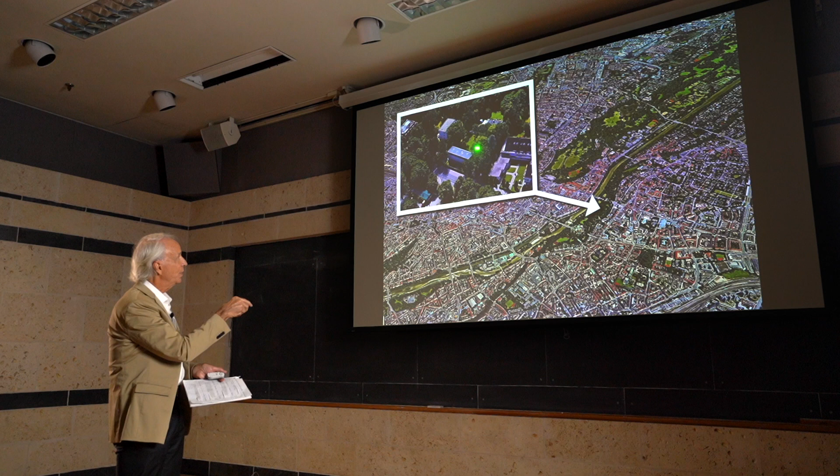So it's in Munich, in a residential neighborhood. This is the woman's house that has a lot of her art collection in it, and the gallery went in the front yard right there toward the street, and now there's a garden between the two. It's a very simple rectangular building in plan. Underground, there are some extensions that go out for utilities and for a little storage area for art.

You can see the section where there is a gallery with a clerestory window, and on the lower floor, there's a gallery with a clerestory window. Then there are stairs that take you up to a mezzanine level, because the mezzanine level for the lower floor is the ground, and that's where there are some of the offices and the entries at that level, and then the stair connecting those.

Now, that section was like that, where a good bit of the building is below the ground for some very good reasons. I mentioned in the last talk that they were very interested in energy conservation. They were birthed as architects in the 70s when there was an energy crisis, and so they were interested in passive solar heating. It's down below the ground, and they're using an earth-air heat exchanger where they use the warmer temperature of the ground to heat the building. So partly by putting it in the ground, that gives it some temperature stability.

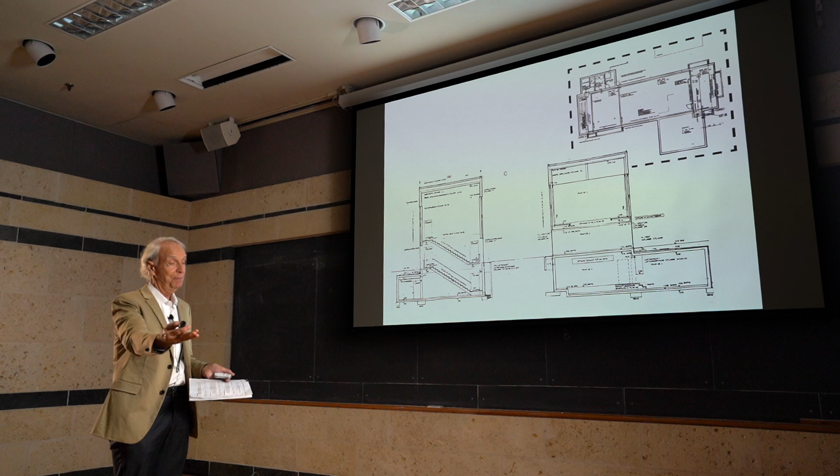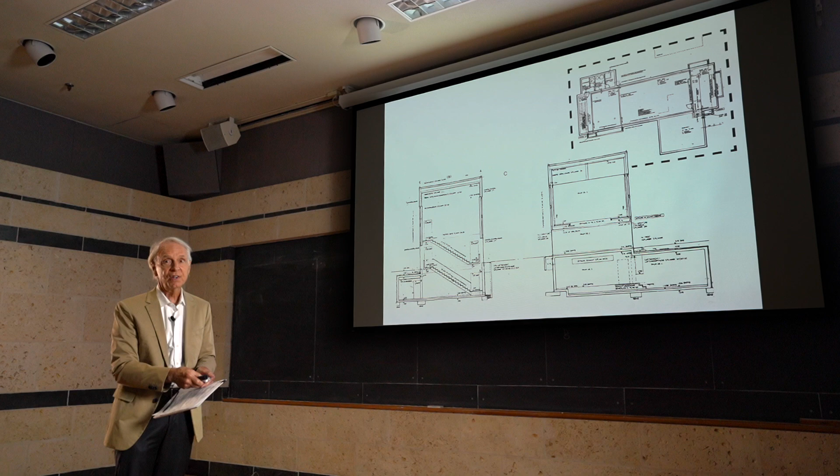They actually have air that is warmed through the ground and then heated a little bit more and sent into the galleries, so that when it's maybe 20 degrees outside, which it frequently is in Munich in the wintertime, well, the ground here is 60 degrees. So they can get it up 40 degrees by that means, and then they just boost in another 6 or 8 degrees to get it comfortable inside the gallery space. So it's that earth-air heat exchanger in the section of the building, and how it interacts with the ground has everything to do with energy conservation.

Another issue they deal with is this whole notion of materials. They're all over materials—they love materials as a generating factor for architecture. They say, we're trying to expand the role assigned to materials in traditional usage by changing their form and making them available to a new manner of perception. All materials interest us in the same way. When one speaks of materials, it always depends on how they're joined together, in what manner they're used, and so on. So obviously in the Goetz Gallery, there's very interesting material usage with that birch paneling and the very sleek glass that's very ephemeral.

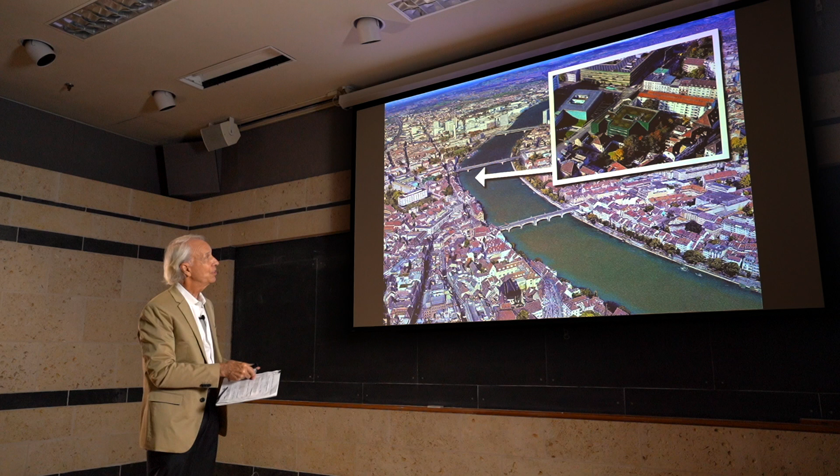That's one thing that's nice about that neighborhood: you have your normal European fabric, which has very little green, but this one has tons of little pocket parks around. On their site there was a little pocket of green, but it didn't creep out to the street. So the idea was to take that green and extend it out to the street. They used green fritted glass, and vines as well.

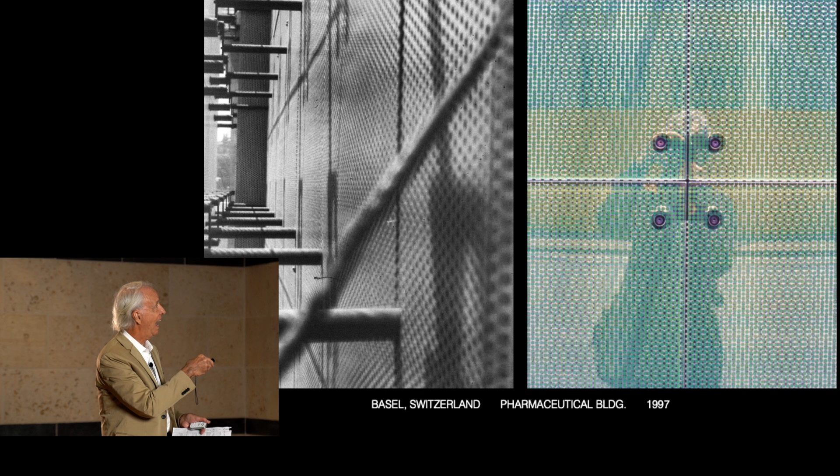The green fritted glass is very beautiful, a sensual material—something you wouldn't expect glass to have this kind of presence. It's got a dot pattern, and at the corner where you see two layers of glass, you can see a moire pattern when one dot pattern plays against another. That's happening all over the building because there's about an 18-inch space between the glass and the outriggers that hold it up.

The skin of the building is an insulated panel which also has dots on it, and the dots on the insulated panel match the dot frit on the glass exactly. So as you're looking at it, you're constantly seeing this play between the two dot patterns, which gives an active liveliness and depth to the glass that's really quite extraordinary.

It's also doing a big thermal job. The sun shines in and heats up that area in the wintertime, creating a nice blanket of warm air outside the building. So all the way around, instead of trying to heat the building to 68 degrees against 20 degrees outside, they've superheated this blanket of air via the greenhouse effect to maybe 65 degrees, so they might not even need to heat the building on the inside, except on extreme days.

So again, it's passive solar—they're using the glass for technical purposes, and also for this rich visual purpose. Here the glass is on a courtyard on the inside where they have water on the floor with lily pads, so there are green dots on the water and green dots in the frit, and you can even see it in the glass on the soffit.

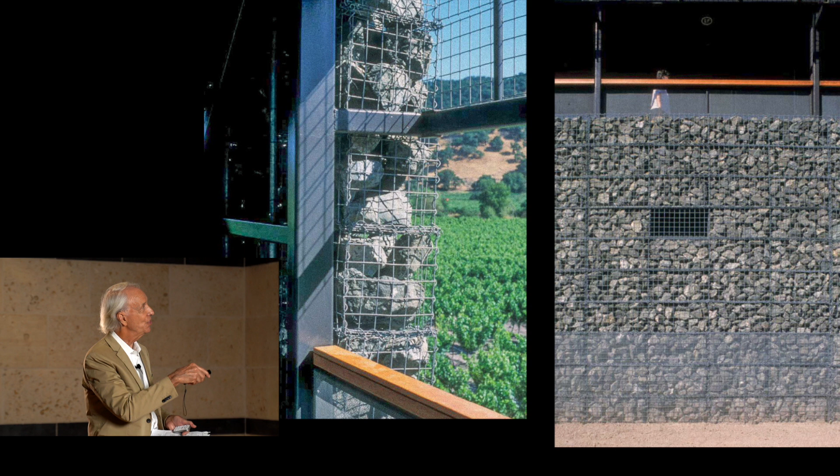And the building is actually made of gabions, which is a wire armature with these rocks that are actually local rocks, the kind of rocks you take out of the field when you start to till it for the vineyards. They become just a part of the building instead of a part of the landscape there. And they're being used technically in many ways.

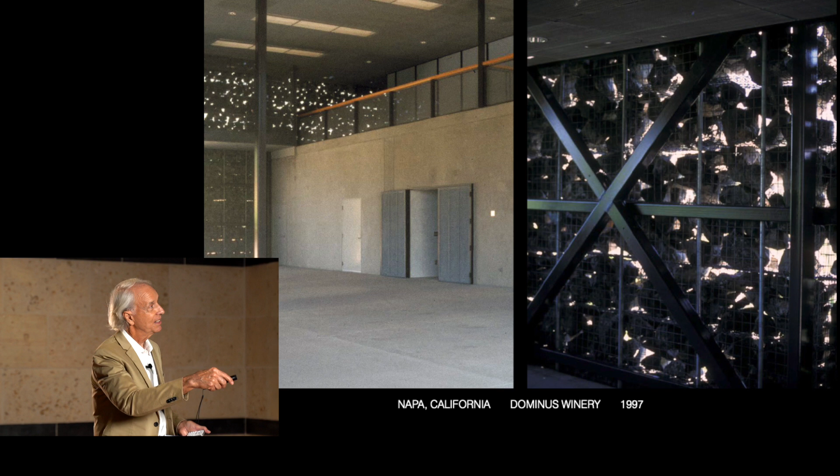The hot sun hits the rocks, that heats them up, and the warm air rises through that porous layer of the rocks. And then it creates a breeze that draws the air through the building, all around. So it makes it able to, if you have a shady space with that air movement, be very comfortable anywhere in the building with no heating and air conditioning.

And because this is a pretty salubrious climate, many of the spaces that are really active spaces are outdoors. The passageways are all outdoors. They're outdoor conference rooms. So this is the second floor and office areas, and there's very little ductwork, as you can see on the ceiling. There's not really that much heating and cooling. Mostly the building is taken care of in a totally passive way. And that's true in the more technical parts of the building as well.

This is not a snooty winery where you go and do wine tastings for the tourists. Not at all. In fact, tourists can't go there. It's strictly an industrial production facility.

So they're processing the wine in these tanks, and then they're putting them in wooden kegs, and they're aging the wine there. And in both environments, they need a very stable temperature. So the building is all about keeping that stable temperature. And of course, one incredible device for doing that is high thermal mass. So if you can get, like in a cave where wine was kept originally, that high thermal mass keeps a stable temperature and resists the diurnal swing of warm during the middle of the day and cool at night.

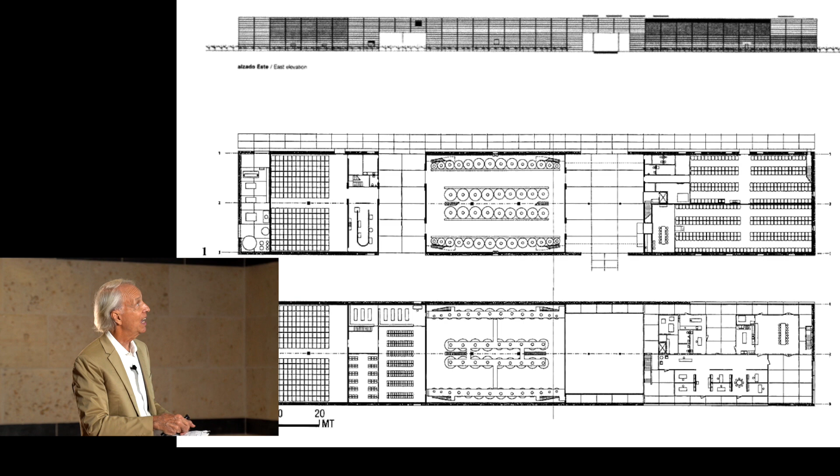So those thick concrete walls that we're seeing around here, as well as the gabions on the outside, are providing that very, very high thermal mass that gives great temperature stability to the aging room here, to the processing room there, and to all of those parts of the building that have to do with that greater temperature stability.

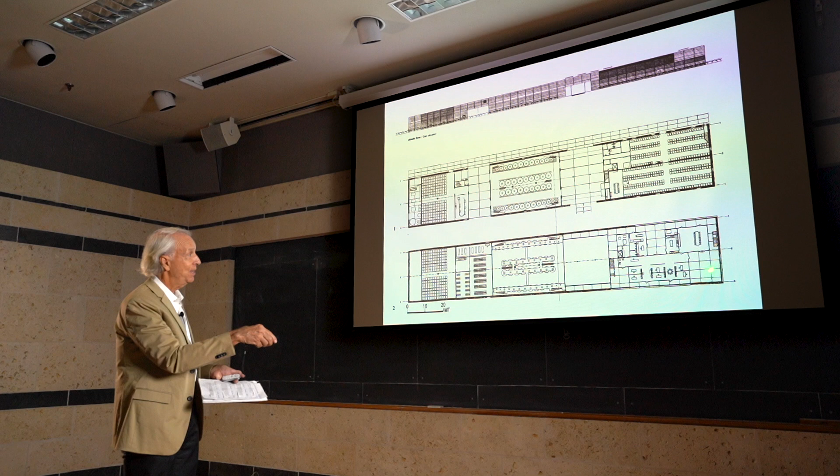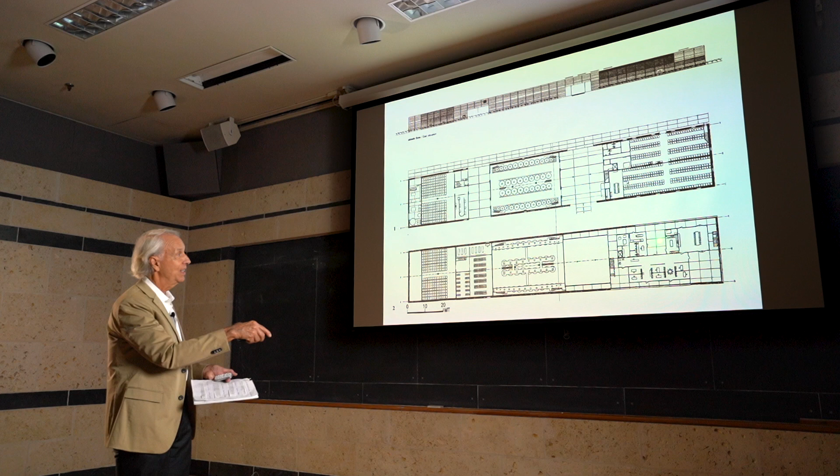Then up here, where we're getting the offices, those walls thin up, the concrete is gone, we don't have the gabions anymore, we have large openings, and that's where you get these open areas that are passively heated and cooled and ventilated, with beautiful views out to the vineyard. There you can see that massive wall down where these kegs are, the thick concrete, and then the gabions on that, keeping that great thermal stability.

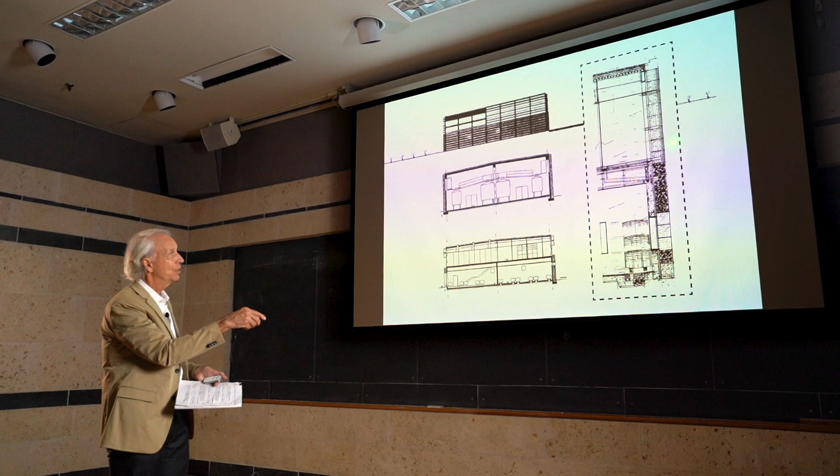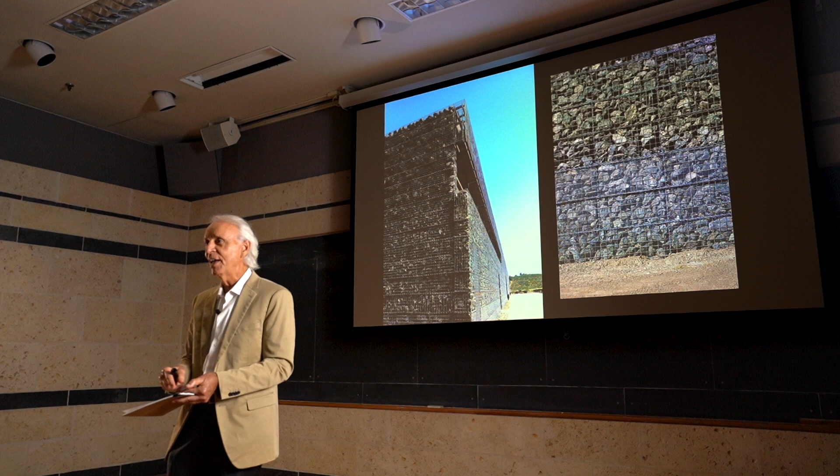Above it, where you have the offices, the whole wall is gone, and it's a completely different thermal situation. The gabions are a very odd material - this is them exploring materials in an incredible way. Gabions are usually used for retaining walls in a very utilitarian kind of way, but here they fit the agricultural environment very beautifully. They inexpensively get the high thermal mass that's needed, and they create a beautiful texture to the building.

From the inside, there's an amazing light quality with the light coming through those gabions into some of those upstairs spaces that we see right there. So again, it's about taking natural forces and using them - it's the soil, the sun, the orientation, the geography, the heating and cooling. All of those natural forces are what's really making the architecture.

Another issue that's very prominent in Herzog and de Meuron's work is a reaction not just to natural forces in a natural context, but to urban forces in an urban context. Let me read a quotation from them: 'It's important to us to find the right architecture for each place, which, if possible, is then completed by the city. We have no desire to set up a new establishment, but on the contrary, we want to pursue existing inceptions in order to complete the city, so to speak.'

So the idea is that you're not starting from scratch in a city - you're making the next step in that city. In the case of the Tate Modern Museum at Bankside in London, it was a situation where they actually had an existing building. That's the urban fabric that was there. They started with this old industrial building - it was a power plant. And it was again a competition, which they won.

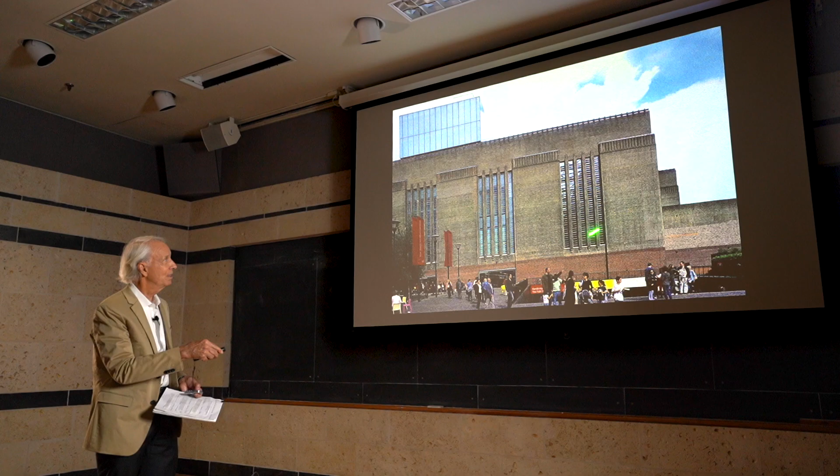While all the other star architects were out there pushing and pulling and manipulating the building, their attitude was: we let the context speak for itself, and if it's doing good, we just leave it alone. So these interventions were very elegant and very beautiful.

The really big move was they took the turbine room in the back of the building, took all the big turbines out, and then made it an incredible atrium space that gave you views up into all the galleries and became a place where you could make art as well. Artists are regularly given the room and asked to make a piece commissioned for that room. So again, a beautiful example of how they took that context and just ran with it - they let it tell them where the project should go.

Then 6 or 8 years later, that museum was super successful. It then spawned a lot of development all around it, just immediately - condominium buildings, office buildings, it got to be a smart part of town, cool restaurants, cafes. Suddenly that became the place to be because of the Tate Gallery moving in.

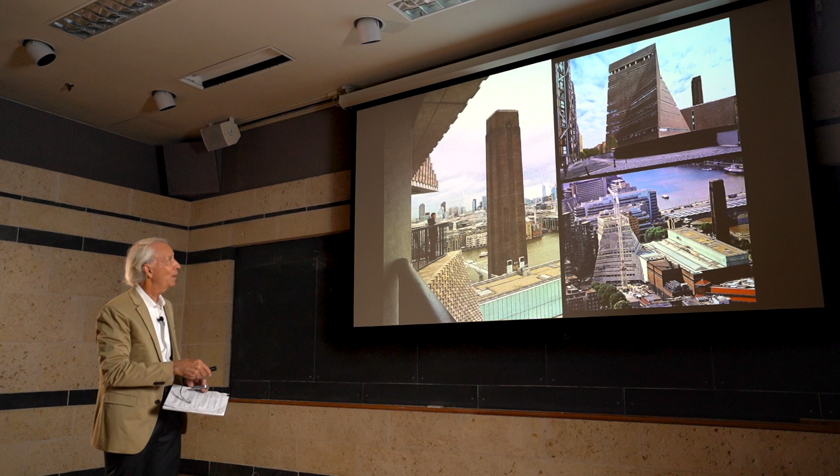And the Tate decided to expand. When they expanded, again, Herzog and de Meuron made a building that is very sympathetic to the context, the original building there, but now matching more the scale of the new development around it, letting the building grow out of a reaction to the city and an engagement with the city. There it is under construction with those other new buildings around it. But now it's able to get up and get some views, making the connection even stronger back to St. Paul's on the other side of the Thames.

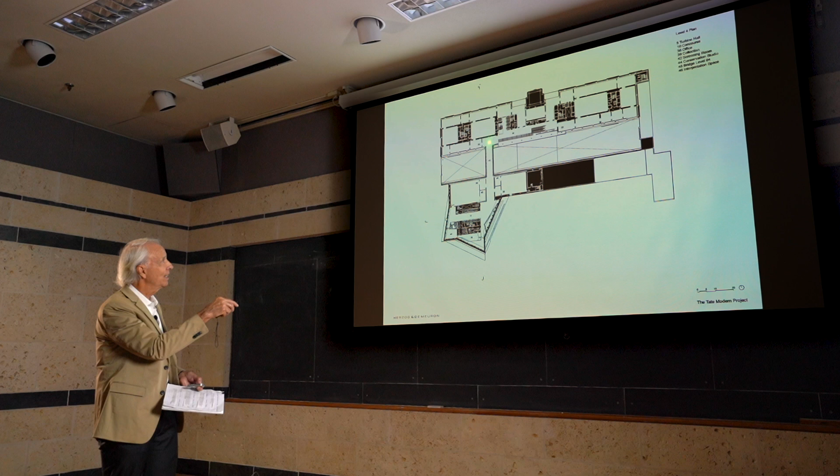That becomes kind of seamlessly woven into the galleries on this side in the old Bankside building - now with a bridge across that atrium space and into the new building on the other side of it. But it's seamlessly growing out of, just evolving out of the city and becoming a reflection of spaces in the city that then become a museum and an engagement with the interior of the building as well as with these ideas about the context there.

So is it new and fresh and different? Of course it is. Is it also like a sibling, like a kind neighbor? Of course it is.

And those things are not incompatible. Herzog and de Meuron seem to have an incredible capability of doing that. Now, that's at Bankside in London.

I want to show another example, a little bit different way of approaching that, at the Walker Art Center in Minneapolis in the United States. This is a very strong, very interesting building. This is them going crazy with materials again.

The skin here—this is of course northern climate, lots of snow—they were kind of inspired again by natural forces. How could we make the skin of the building almost seem like snow, like the texture and the irregularity, but still the uniform whiteness of snow. So it's an incredible sort of mashed up metal panel that's got perforations in it that gets reflection in very different ways, different angles, and makes a beautiful skin for the building.

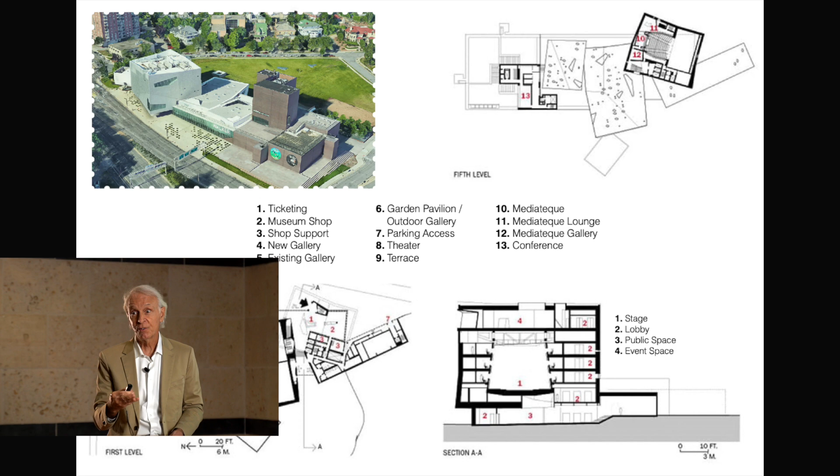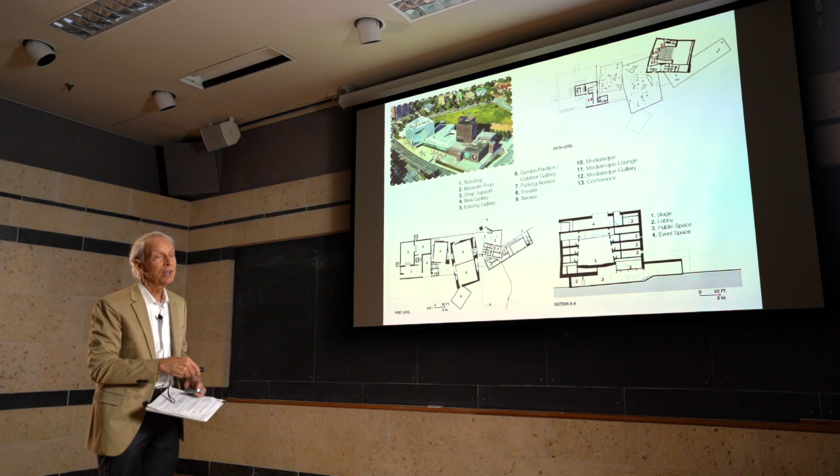But they make a very clear distinction: this is the jewel that was done by Edward Larrabee Barnes in another period, and we're not trying to be Edward Larrabee Barnes or do that. We're going to be a really good neighbor. We're going to have a really nice dialogue. And we're going to take little moments of that and thread it into the building, but it's not going to be a kind of seamless extension or replication.

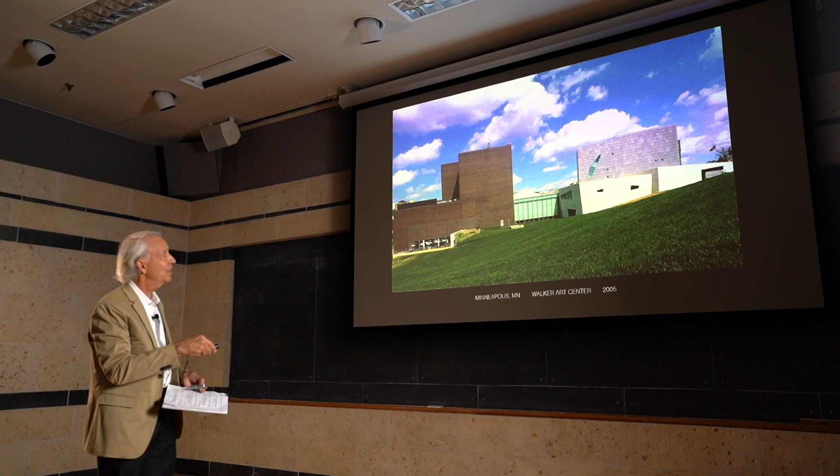So that's how it sits in the city, just at the edge of downtown Minneapolis, with this park in the back that both buildings spill onto, both buildings engaging with the park there. And the lower portion of the building is just like the lower portion of the old building, and the tower just like the tower of the old building.

And then inside, taking all those rich white colored materials but combining that with that Nebraska iron spot brick. So they take the same flooring material from the old building into the new building. So there is a kind of seamless journey inside between the two buildings, and that becomes a major feature on the inside of the new building.

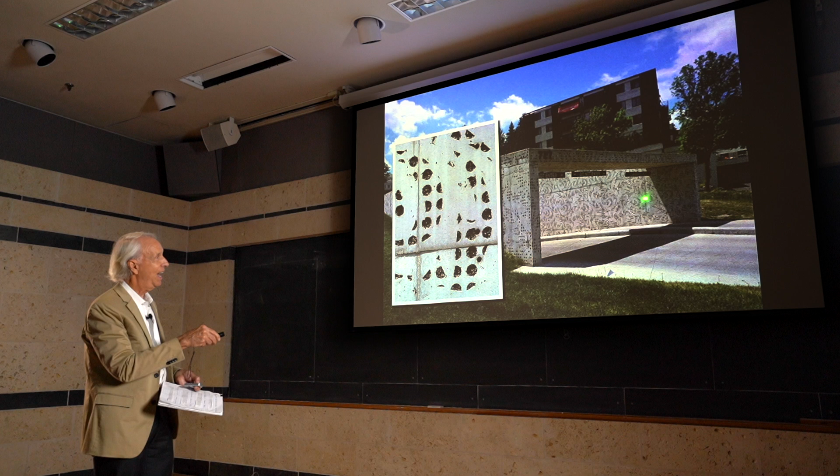They are so clever with the use of ornament. In this case, a little bit of whimsy and flourish. This is a concrete wall going down to the parking garage where they just put a form release on the concrete formwork that creates this same pattern that's on the inside of the building in a very subtle way.

Again, they're doing many of the things we talked about: incredible material usage, incredible use of the forces of nature. But in that case also, a little bit different take on the way they use the urban environment to generate architectural form. Okay, the fifth issue I want us to look at is on this notion of integration, of how you take all the pieces of architecture and synthesize them.

So they say, we are not particularly interested in either structure or ornament or space as such. Things start to get interesting when you bring these elements together in a single thing. And if you can experience it by moving through the building, by using it, when you integrate them into a whole, it's easier to make them reappear.

So the idea is that you don't focus on structure, you don't focus on ornament. You're doing all these things concurrently in a way that the whole adds up to more than the sum of the parts—you get real synergy in that. And I think a great example of that is the De Young Museum in San Francisco. This is the building that, right after they got run off from UT and did not do the Blanton Museum, they immediately got the commission to do the De Young Museum in San Francisco.

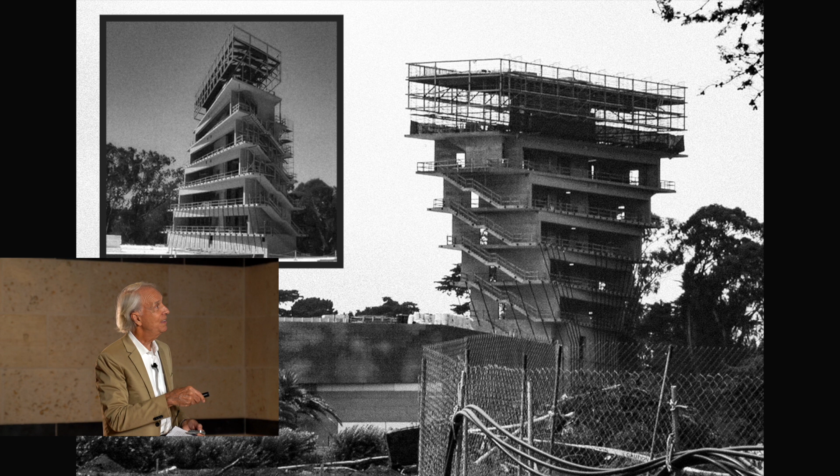This structure is twisted around like that in order to give it lateral stability. It's in an earthquake-prone area. If you just made a long, thin rectangular box in the short dimension, there would be a weakness that in an earthquake might give way structurally. So they twist it so there's not a short dimension, so it's resisting loads in multiple directions, dealing with those lateral loads that are vulnerable in an earthquake.

So it is structure, its form, its space, its view, its function, but all of those things happening at once in one kind of strong, synergistic gesture.

I think the skin could be looked at the same way. This beautiful copper skin sheaths the entire building. It's both perforated and dimpled. Dimpled to give it greater strength. Perforated because sometimes you want ventilation. It's used to cover air intake areas for the air conditioning equipment.

And then it can get denser and thicker and not be there for intake in the air conditioning equipment. It's sometimes used for shade. You can see here there are two layers of it, giving a wonderful dappled light, a soft light down below. So it's used for sun control there.

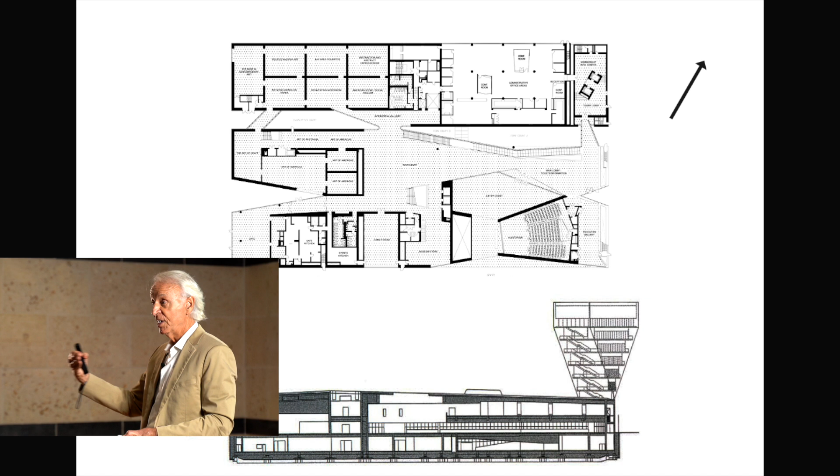So that's what they're saying, that when you integrate all of these issues, that's when architecture really gets interesting, and it begins to be more experiential.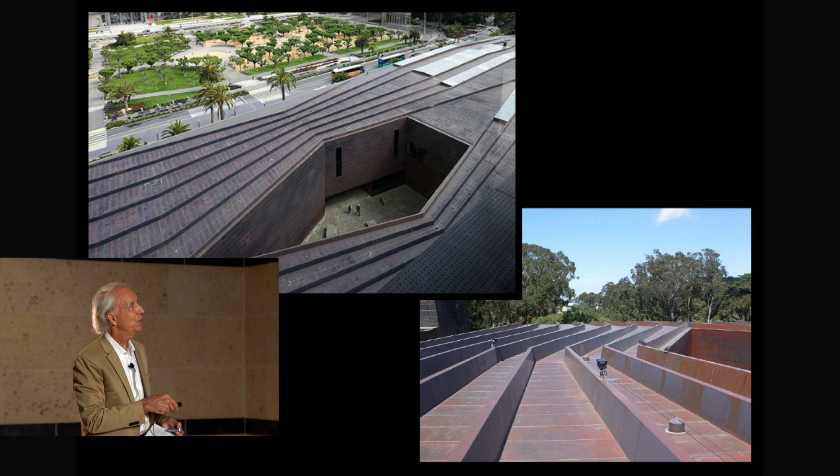And from that upper gallery, all of that is displayed to you. You can see across to a building by Renzo Piano, which is the Science Museum adjacent to it.

All the way through the building, there are these little courtyards that give light and a little vegetation and visual relief in parts of the building. So you're constantly getting that relief as you go through the galleries and through the lobby as you pass through the building. And it has an amazing variety of galleries.

There's a very eclectic collection. It's traditional art, as you see here, and it's contemporary art, as you see here. And the galleries are very different in response to that.

This is an architecture that takes many, many different points of view and finds solutions that integrate those various points of view and bring them all together, making a solution that does five things at once. And in their mind, as they say, that's when architecture gets really interesting.

So another issue they're interested in is the visceral impact of architecture. They say we're absolutely anti-representational; the strength of our buildings is the immediate visceral impact they have on a visitor. For us, that's all that's important in architecture. We want to make buildings that cause sensations, not represent this or that idea. The idea is not for the building to be didactic, but to be a powerful experience.

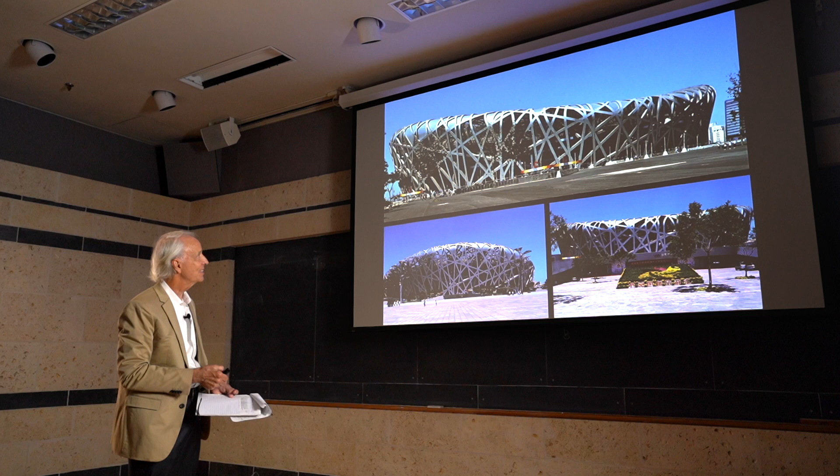A great example of that is the Bird's Nest, the Olympic stadium they did for the Beijing Olympics in 2008. You can see this incredible web of sunshade all the way around the outside, and inside is the stadium itself. That is structure—it's actually holding the thing up in a diagonal way rather than a more orthogonal way.

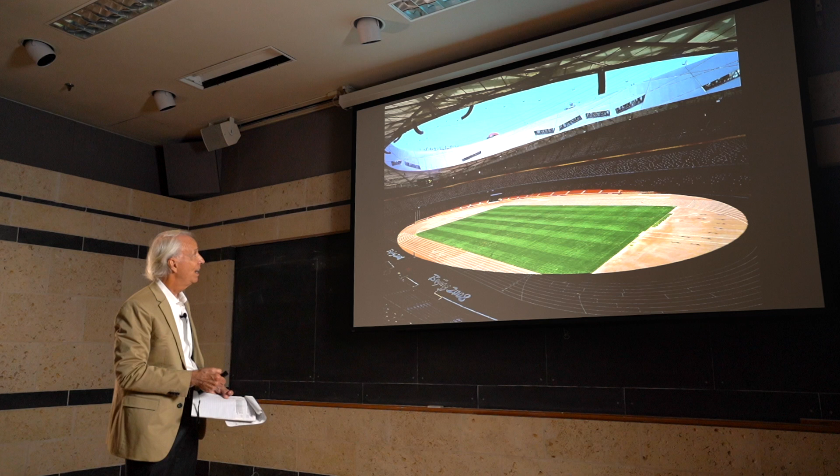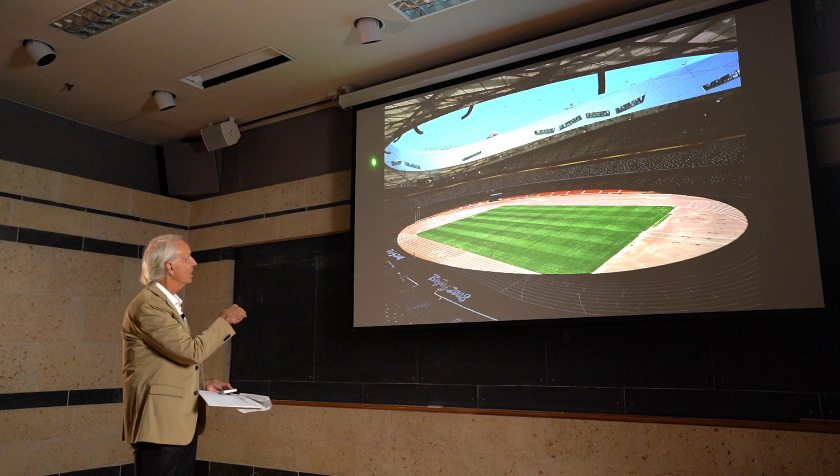Inside there's the big arena, a magnificent, huge Olympic stadium, again with shade because it was a summertime event and it's hotter than hell in Beijing in the summer. So there's this tent space that covers and shades the spectators, and all of that is just that kind of web you can see reflected onto it. But a spectacular experience.

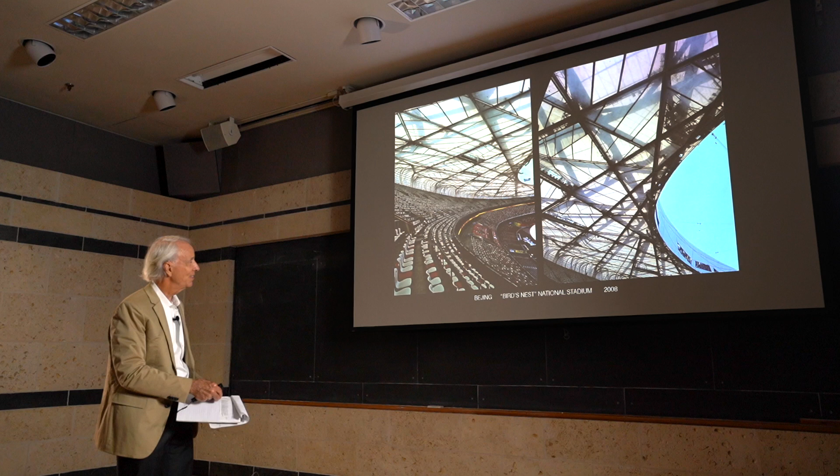Now they don't have a whole lot of big sports events in China—they don't play football or soccer or those things. But when I was visiting, they had the music from the Olympics, and on the big screens they had images from the Olympics. This was years after the Olympics and they were still playing that music. In that space, it was spectacular, really uplifting and thrilling. There were hundreds and hundreds of Chinese, very few international people, who came to visit and to relive and rethink the glory of the Olympics when they were in Beijing.

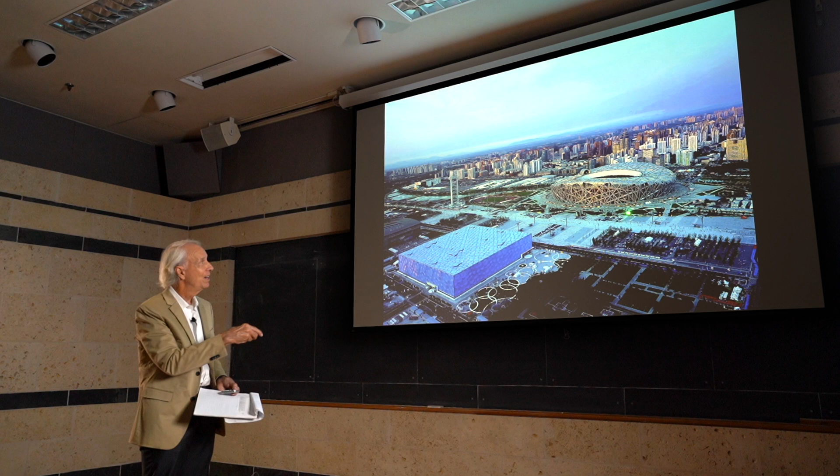Now it's not used so much as a stadium. The swim center, or aquatic center, from the Olympics has been turned into a kind of water park. But this one is just used for people to visit, and occasionally there's a rock concert or something like that. But it's an incredibly powerful and important landmark in Beijing.

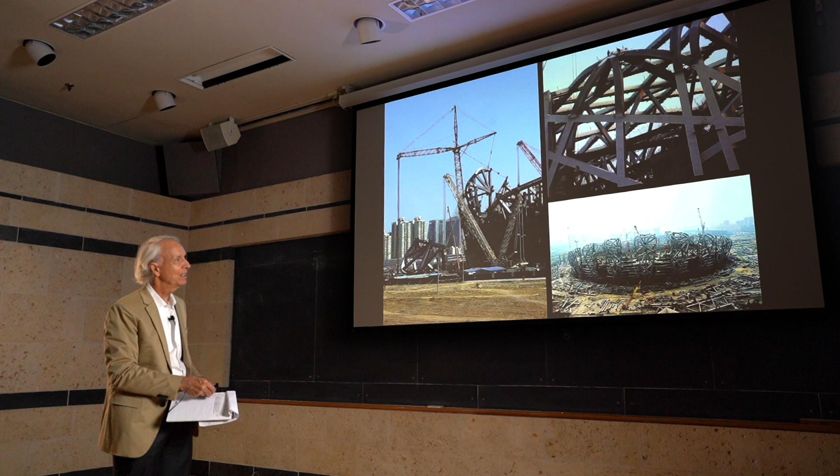Okay, a final issue. Herzog and de Meuron are very interested in regional differences, how they express different places. They say, unlike other architects and town planners, we do not believe globalization is taking us toward a generic city. Cities are moving toward the specific, but not in a romantic sense, one in which every city would have its own character, existing autonomously in an unchanging world, different from other cities. So the idea is that we're not aiming toward generic rules, generic cities, generic buildings. Instead, each place has the ability to have a specific architecture that's responding to it.

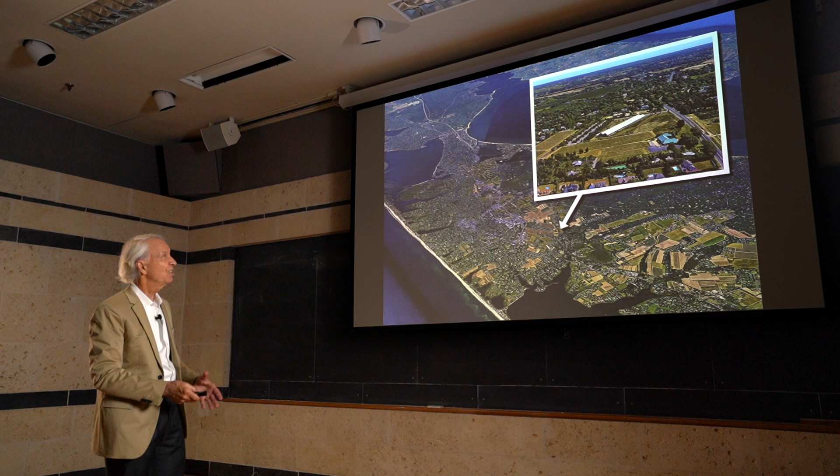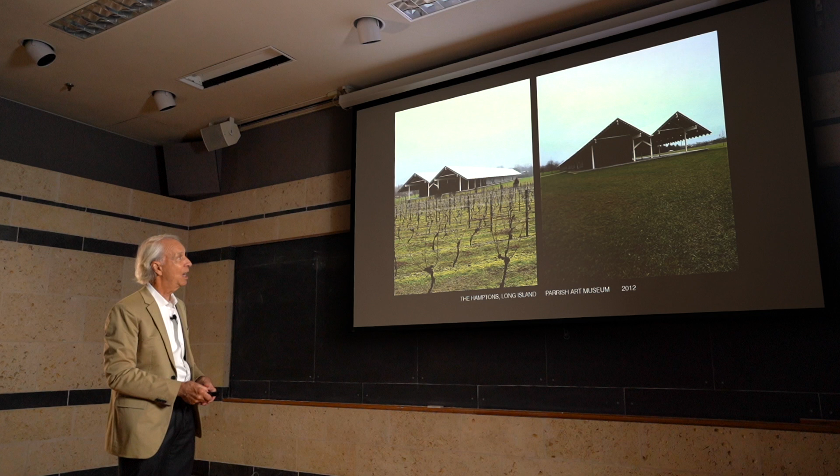I want to show two buildings that exemplify that beautifully, two quite recent buildings. One is the Parrish Museum, on Long Island in New York, toward the end of Long Island. That's the Parrish Museum right there. It's a relatively rural area, with a lot of potato barns and barns in that area. In some ways, the Parrish is just this big, simple, utilitarian building for displaying art. It sits out in a big green field, with these simple gabled roofs. It was quite an economical building to build.

Not like anything else in their work. That's one of the things I'm just blown away by—the range of their architecture. They just don't repeat themselves. This one feels just perfect on Long Island. It reflects that place, with a kind of eccentric farm quality, where buildings are just made the way they make sense to be.

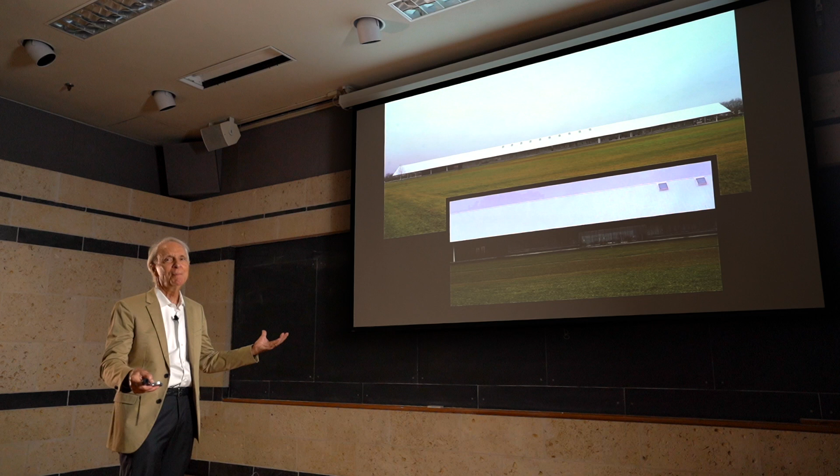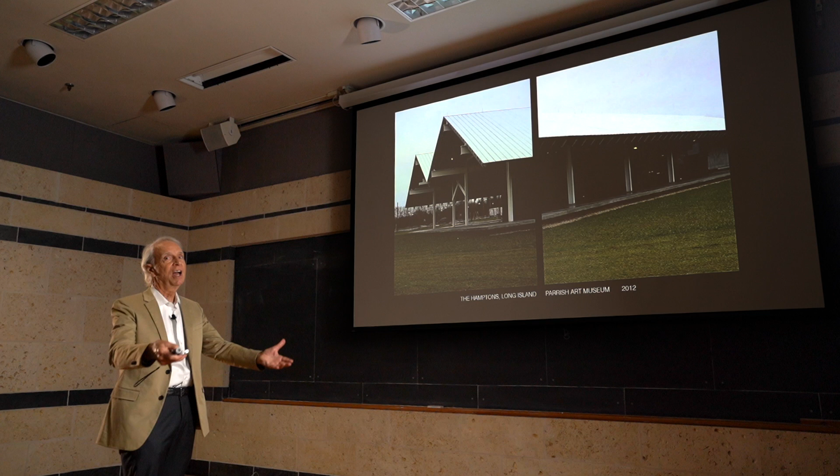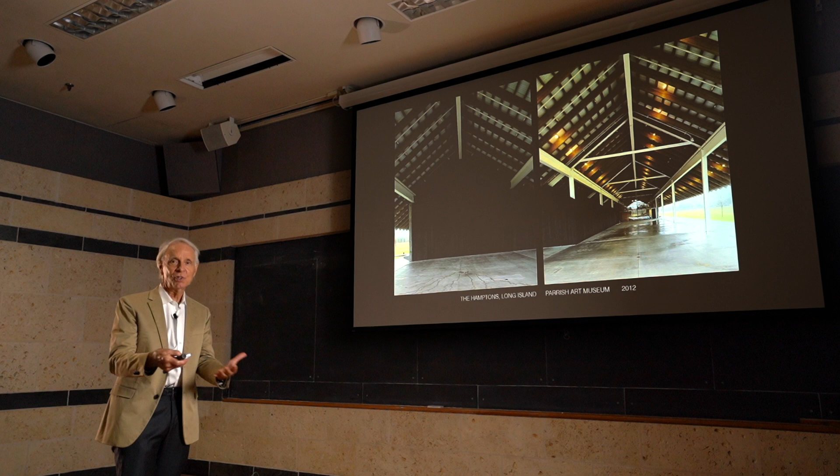And this was just a long, simple volume there with big outdoor porches for outdoor events, because in the summertime, which is when Long Island is really alive, they have all these summer residents that come out, and that's really when the art museum is most lively. And they have these big porches where events can be held there. And that's very much a part of a regional identity, an identity of that place of being outdoors and enjoying the summertime in particular. The very casual, not fussy kind of museum environment.

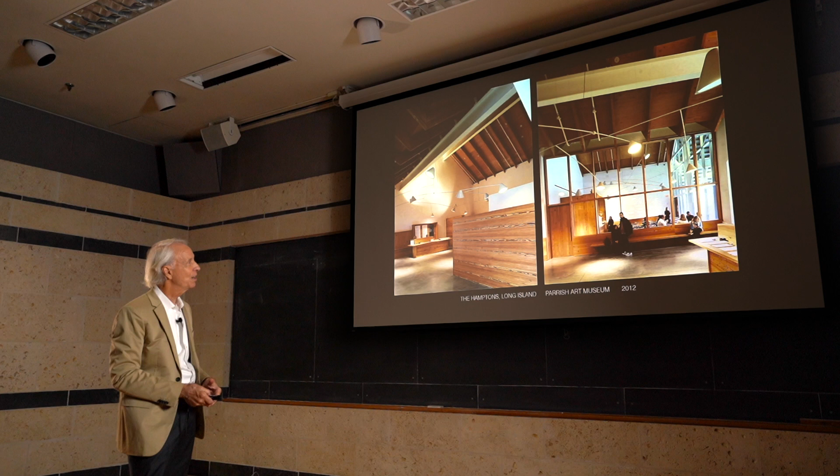The natural woods, giving it a kind of rural feeling to it. Lots of wood exposed. The concrete work, not fussy concrete, but rough and ready concrete, utilitarian kind of concrete. And you can just walk by and see the administrative offices. It's not a pretentious museum at all. It doesn't separate the staff from everyone else.

And as you move through the museum, it's lovely. The art looks spectacular on the walls. The light is gorgeous, but it's very simple. The scale is magnificent. You really feel like you're in an important place, looking at important art. And this is a museum that actually does have quite a good collection, a place where you can relax and you can sit and you can enjoy the art in a comfortable way, not a kind of snooty museum where you're herded through.

And then lots of places for little kids and an enjoyment of art in very different ways. So I think that has everything to do with being in a kind of rural environment, being on the end of Long Island, being in a place where summertime is the most lively part of the year, and where you can be outdoors and enjoy being outdoors. All of those things are what are generating the Parrish Art Museum.

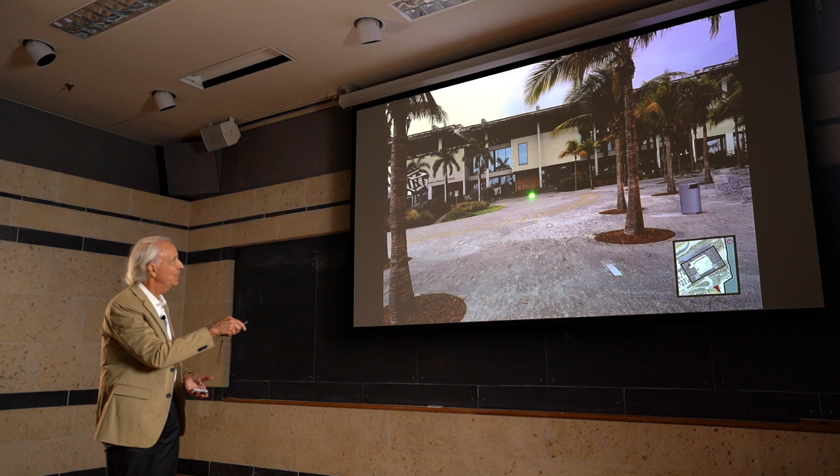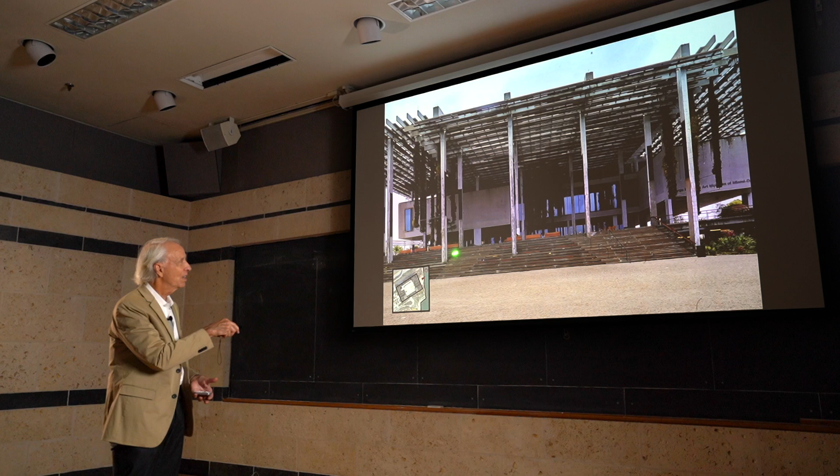And then it also has a lot of natural materials, which you find in tropical areas, teaks, and again, a kind of informality, the palm trees and banana trees and vegetation, very appropriate for that region. And then as you move up into the building, lots of casual places for a casual lifestyle there. This is a kind of amphitheater area there, and then there's little amazing like hammocks and play areas and so on. Places for kids and places for adults who want to act like kids.

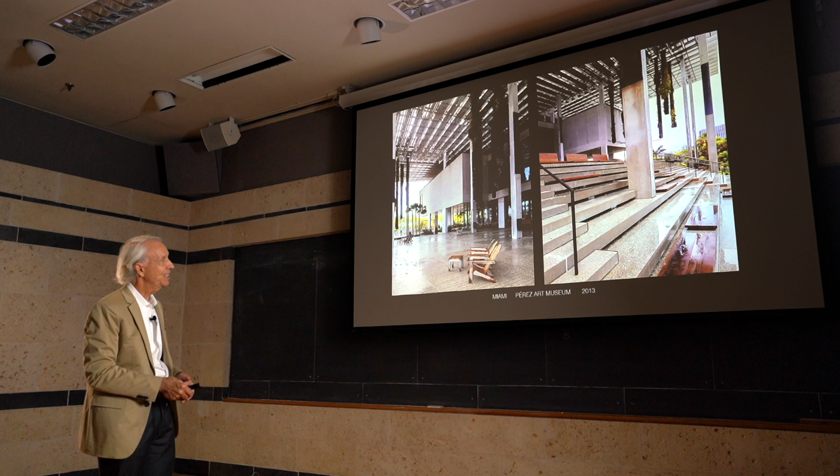But lots and lots of outdoor environments that look out to this beautiful view of the bay. And there's a cafe, a couple of cafes and places to eat, places to gather, places just to hang out and relax. Beautiful kind of local materials, the shellstone concrete and the teak wood. But everywhere this sense of being in Miami. And in every detail, and the kind of weathered quality of that wood, which works very well in a nautical, an environment with salts in the air.

The wood weathers beautifully. And then a kind of lifestyle that goes with that, of being outdoors. And I'll have to say, the day I was there, the eating places were packed full of people. They were having the best time ever. All those outdoor spaces, the kids were playing. It was a really wonderful, lively environment. Unfortunately, when I went into the galleries, well, there were a few people right at the front door, but then pretty quickly, there just weren't that many people in the galleries.

But again, maybe that's Miami. It's more fun to be outdoors and in the sun and at the beach and by the water than it is to be in a gallery space like that. But again, it's so much about the building being a part of its place, being a part of its region, being a part of the city that it's located in. And saying that cities are not generic, but they're very particular.